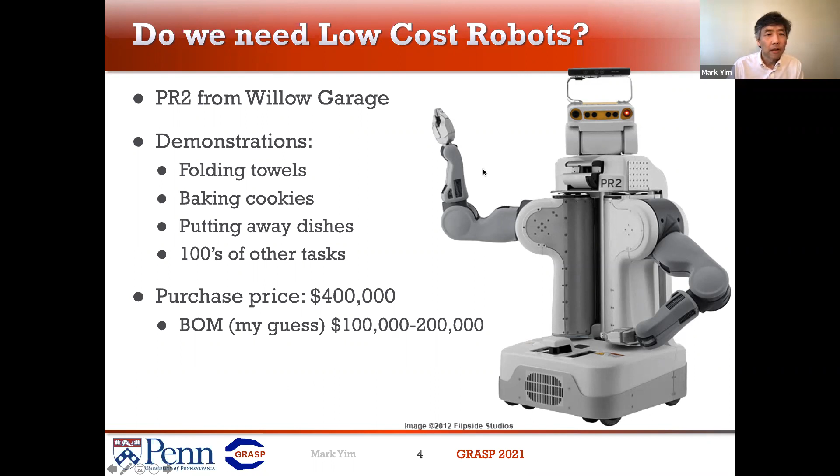So it's pennies, it's super cheap, but what does it do? It kind of walks. It doesn't actually do anything useful either. So this is like the other end of the spectrum from the Willow Garage robot, the PR2. Ultimately, you want to ask, is it cost effective? That means it doesn't only have to be low cost, but it has to do something that has value. And so ultimately, that's what we want to look at. How do we make impact on the world by making robots that do something useful that people might actually want?

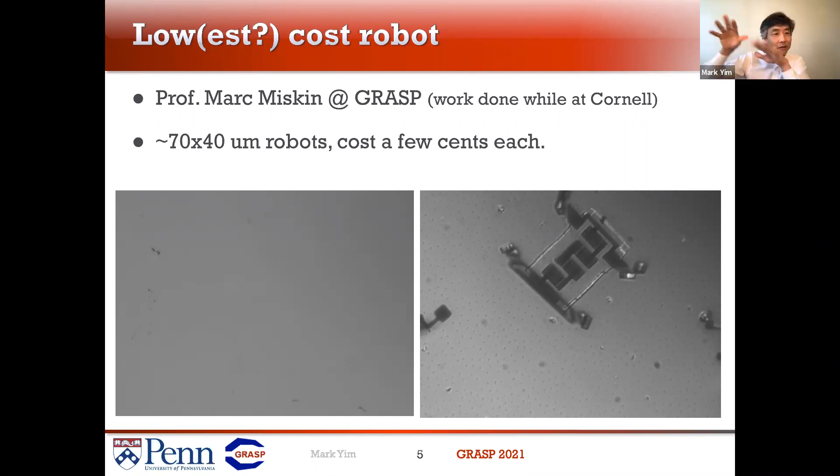And this is where I get to the thing which I put in my abstract. When you talk to other engineers, they always talk about the science they're doing, and often low cost aspects of anything you do in engineering or science don't get a lot of respect. Because it's just engineering, you just engineer it and then it'll be low cost. We've done all the hard work by coming up with this scientific thing, and then you just do the scut work to make it low cost. That's one of the things that I kind of rail against.

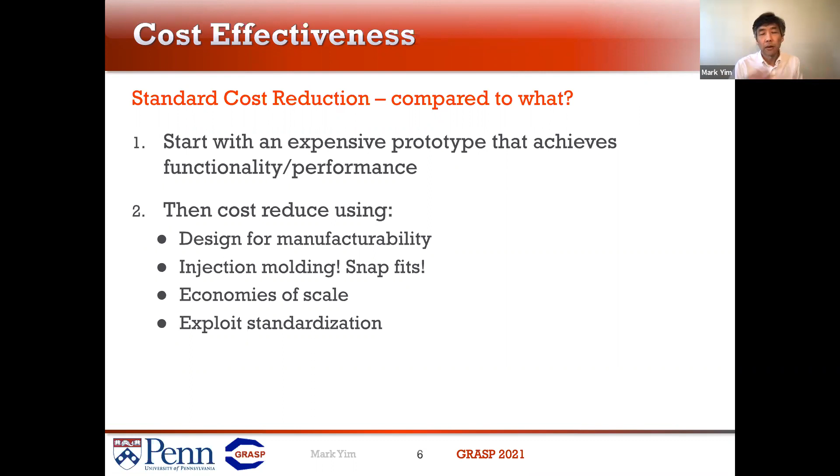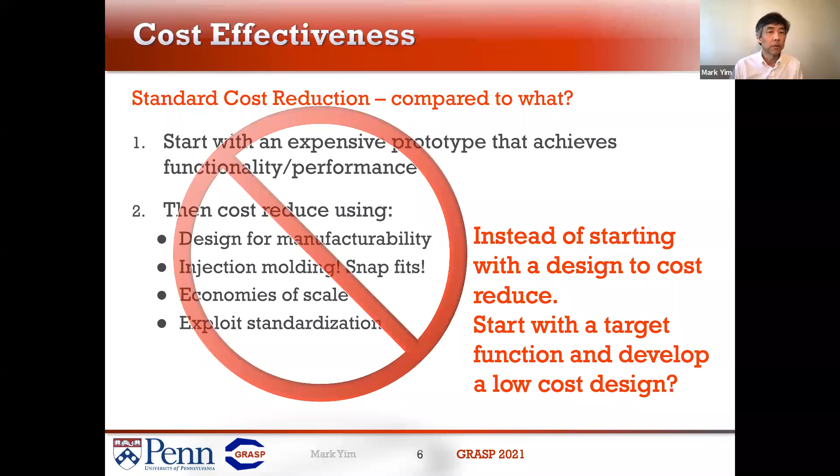In general, when we talk about cost effectiveness or low cost, it's always compared to something else. If you start with a prototype, you have that thing that you're comparing it with, so you can cost reduce and everything makes sense. If you don't already have that prototype, what are you comparing with? So what I'm proposing is, instead of starting with a design, can we look at a target function and develop a low-cost design for that function? And what are some of the principles towards that process? That's basically what this talk is going to be about.

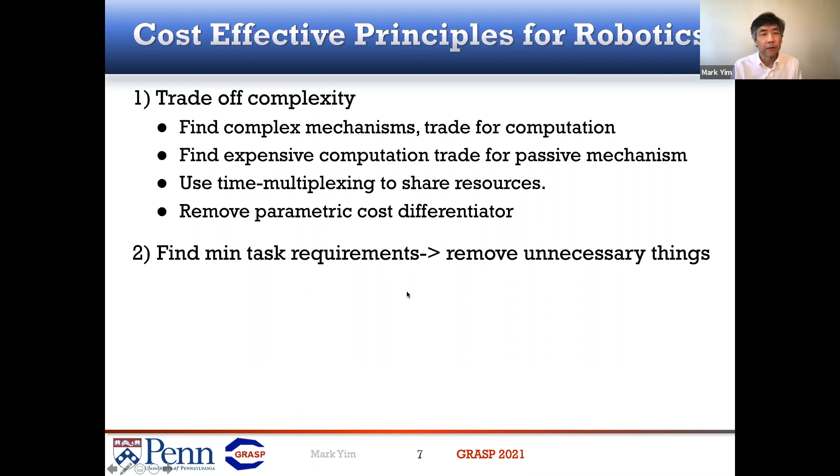These are a couple of the principles that I think would apply to most of the things I talk about. Essentially, you can trade off complexity to make things lower cost as you try to get to a certain target, or look at the thing that you want to do and ask whether you really need all those requirements, or can you remove unnecessary things that don't actually contribute to what you really want to have happen.

Within the complexity trade-offs, there are a variety of things you can do, like trade off complex mechanisms for computation, find expensive computation and replace it with some passive mechanism, reuse certain resources through time multiplexing, or something I call removing parametric cost differentiators. I'll get into more examples of these as we go. You'll see this slide again and again as I talk about these different aspects. Okay, so let's jump into an example.

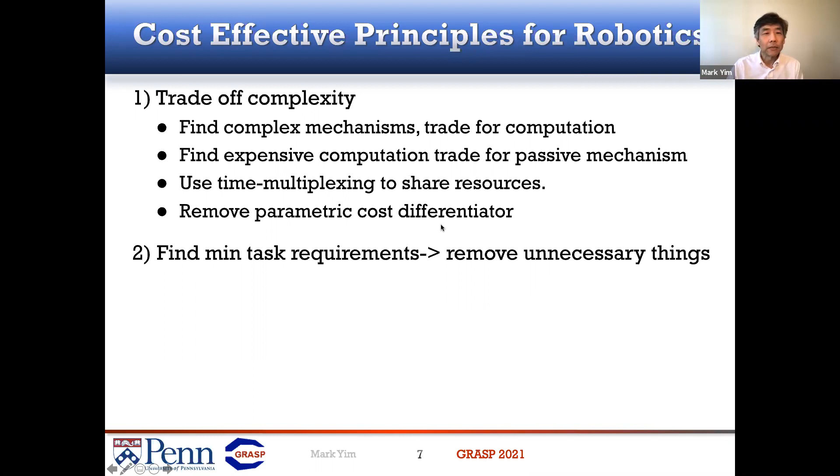Any robot will have motors in them.

Actually, I want to try something in chat. For anyone who has made a robot, can you just say 'me' in chat, so I can see roughly how many people have. All right, so there's plenty of people, somewhere between 20 and 30. And of those, how many of you have used a Maxon motor in your robot? Okay, so it looks like probably half, maybe more.

So Maxon motors are very popular. They are also very expensive. This actually is a funny story. I don't think I have time, but if we have time at the end, I'll tell you about my dealings with Maxon, which actually incentivized me to come up with a different approach. Can we come up with a way of using cheaper motors than Maxon? And why is it that everyone uses Maxon motors?

So to a large extent, from what I know from most people, it's because you want to have smooth motors. You want to get rid of the torque ripple. If you take a motor and you kind of twist it, you can feel the bumps just from the mechanism inside. And we'll talk a little bit more about that.

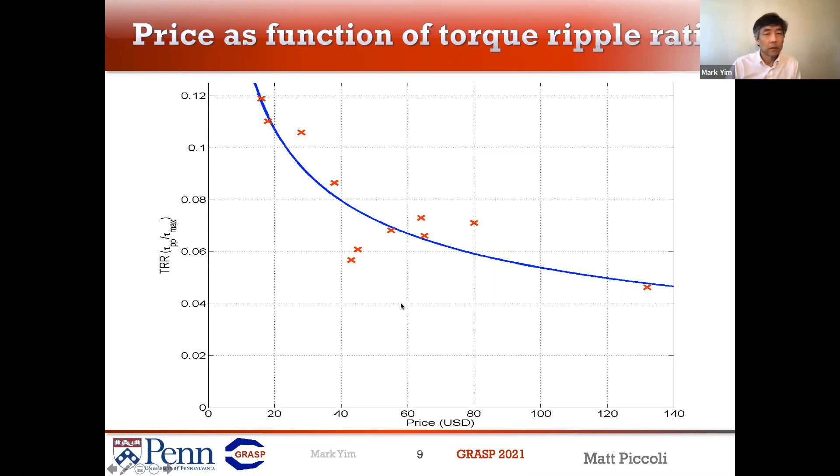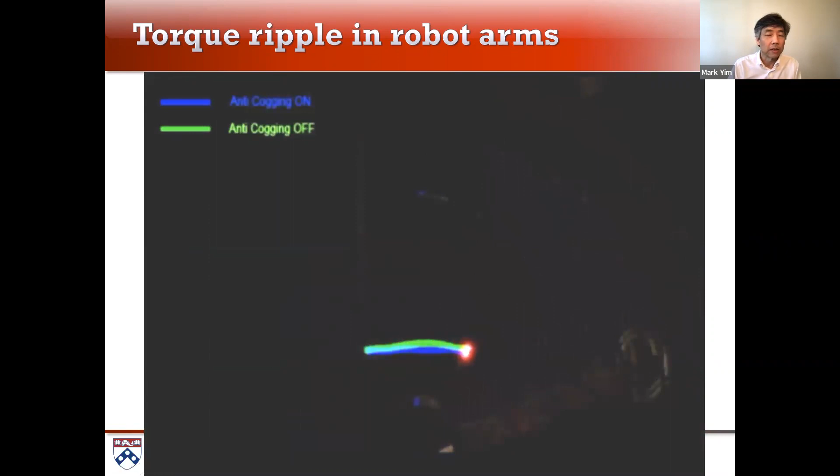So the goal here was to see, can we actually come up with a way to use these lower cost motors and somehow get rid of that torque ripple? And why is this important for robotics? If you've done anything with haptics, you can feel that ripple, and that's a problem. If you do want to do something like just make a path, this is a square with the cogging removed, and if you saw that green path, it's kind of wobbly. So it's kind of useful to have a way to get rid of that ripple.

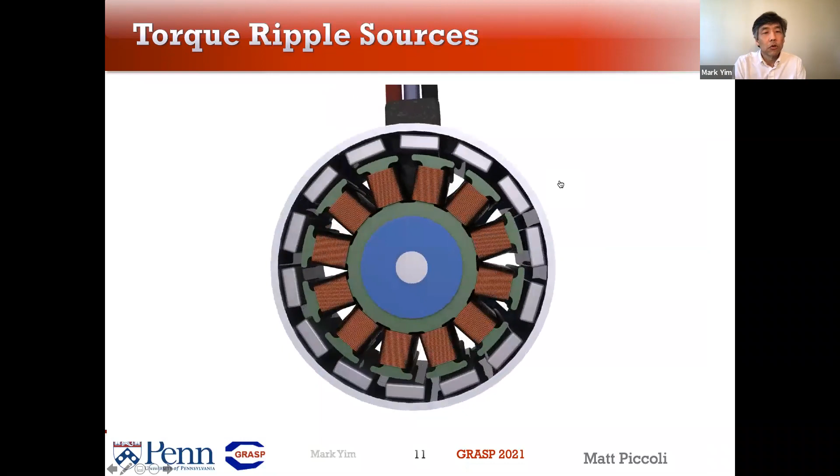So where does torque ripple come from? There's two main sources. For outrunners, you've got the rotor on the outside with the magnets and the stator, which has the coils on the inside. Very often people use what they call sinusoidal commutation to reduce that torque ripple, but it doesn't do everything. It's usually not perfect. It's going to be slightly off. So that's from the mutual reluctance torque.

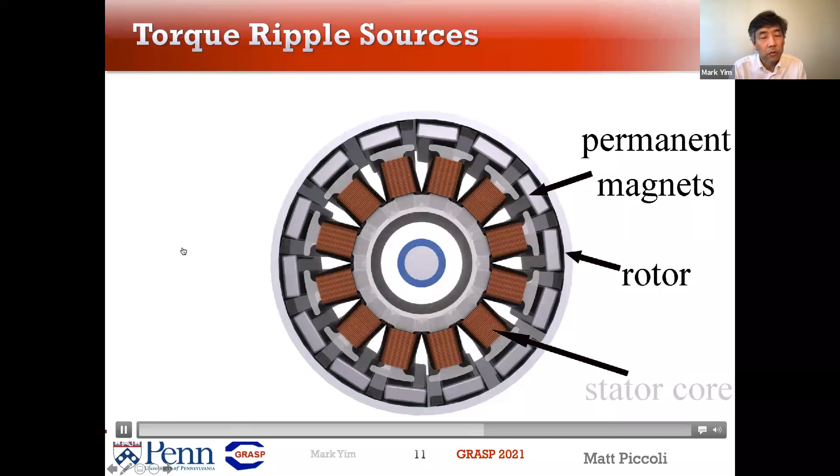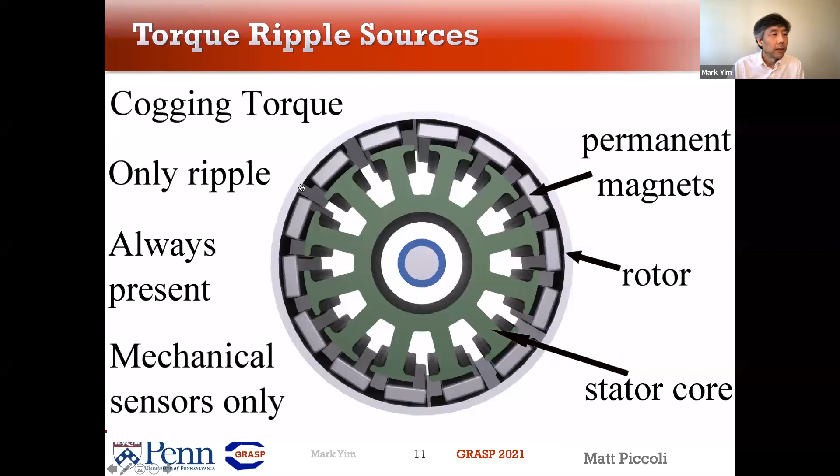But there's also this cogging torque, which just comes from the magnets being attracted to the stator. And that you can't get rid of through any type of sinusoidal commutation. You have to know what it is.

So there are other approaches for getting rid of or reducing this torque ripple ratio. And that includes the different types of commutation, which doesn't do everything. People have put torque sensors on the motors and then closed loop feedback to reduce it. It's a very expensive way to do it.

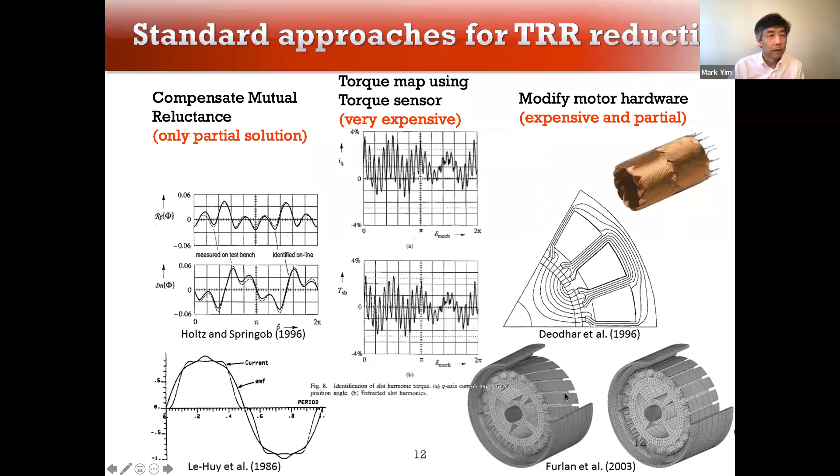And then there's the Maxon method, which is they have these expensive basket wound coils. The way they do it is proprietary, but it makes it very expensive, and it has very low torque ripple ratio because of it. There are other kind of experimental ways of doing things like skewing the stator and other kinds of interesting things, but they're typically very expensive.

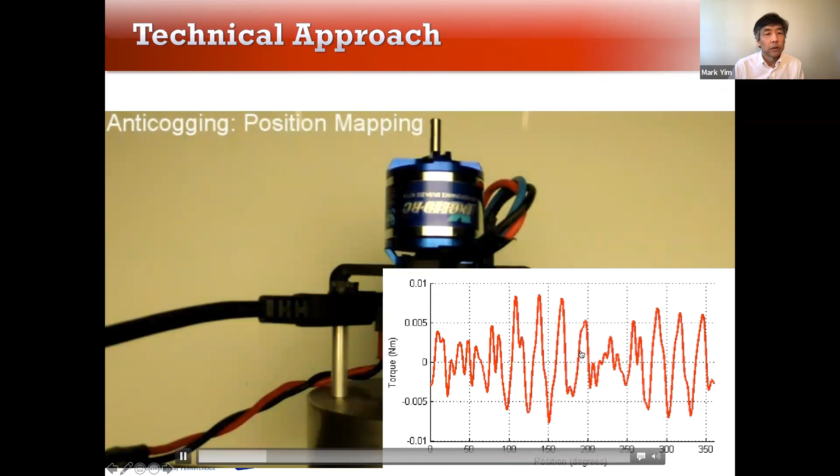So what my student, Matt Piccoli, came up with was a way of measuring this torque ripple ratio by putting a position sensor on the motor. And if you have a robot, you're going to have a position sensor on it anyway. So once you have that position sensor, there's two different approaches. You can either add an increasing amount of current until it just starts to move to find out what that torque ripple is, or you can do a constant torque and see how the speed varies.

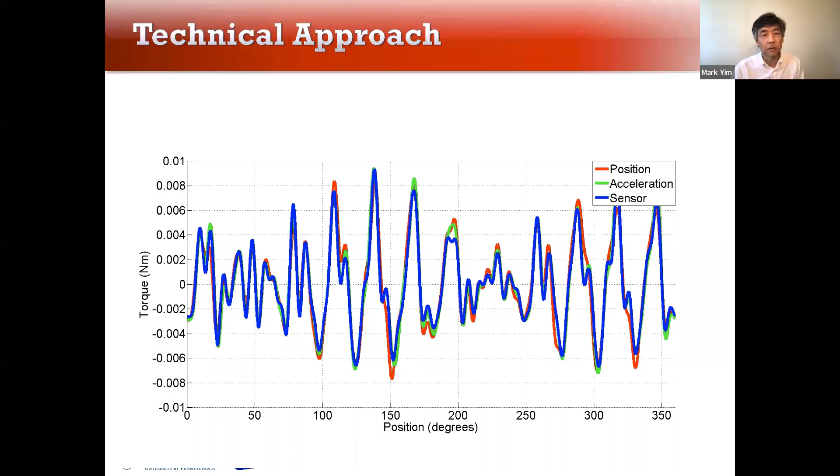And essentially you can map out that torque based on the different position. Once you have that, you can invert it and then apply this to every command to compensate, depending on what the position is, to smooth out what the motor looks like.

So compared to the cheapest motor, the Maxon is 9.4 times more expensive, almost an order of magnitude more expensive, but the cheap one performs better. It's smaller, it has higher torque, all around, and all of them actually perform better than the Maxon motor.

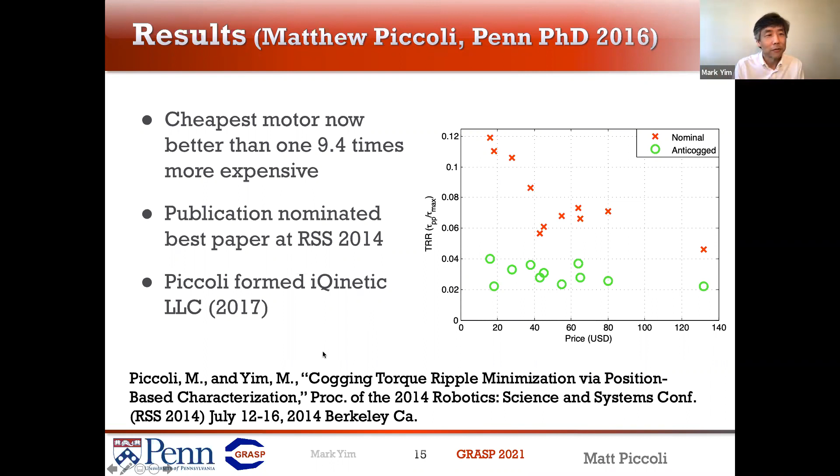So that's one way of doing things. So essentially, this is what I call the parametric cost differentiator.

The torque ripple ratio is a parameter, and it's a differentiator which makes the cost different. So if you can remove that, you can then get more cost-effective results.

There's a question in the chat: what kind of encoder resolution is required? This was, I think, one of the Austria Microsystems magnetic encoders, and it was like 1,000 or 2,000 resolution or something like that. I'm not sure that you need that, but those are cheap and they work well. So compared to Maxon motors, we were able to improve the torque ripple performance.

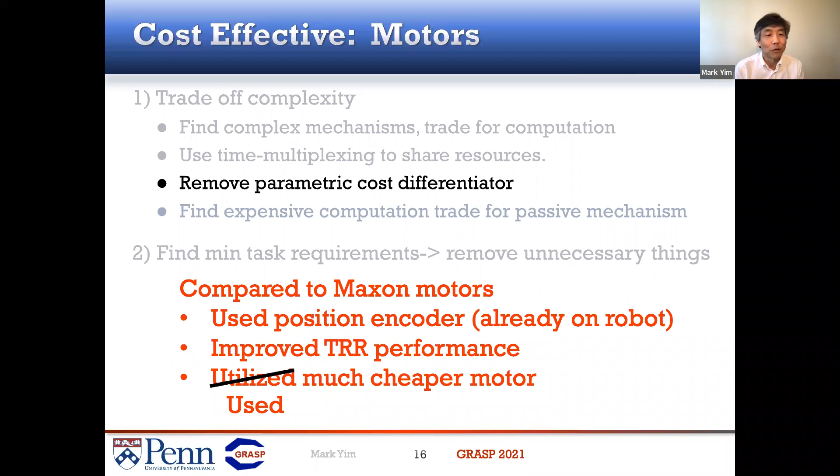There's another thing that's interesting here. So we utilized a cheaper motor. I wrote a proposal with Allison Okamura, who I think many of you know, and she says, anytime you see the word utilized, don't use it. Use the word use, because in this particular case, use is more cost effective than utilized. It's shorter, it means exactly the same thing. So you don't ever need to use the word utilize. So in my parlance, it's more cost effective.

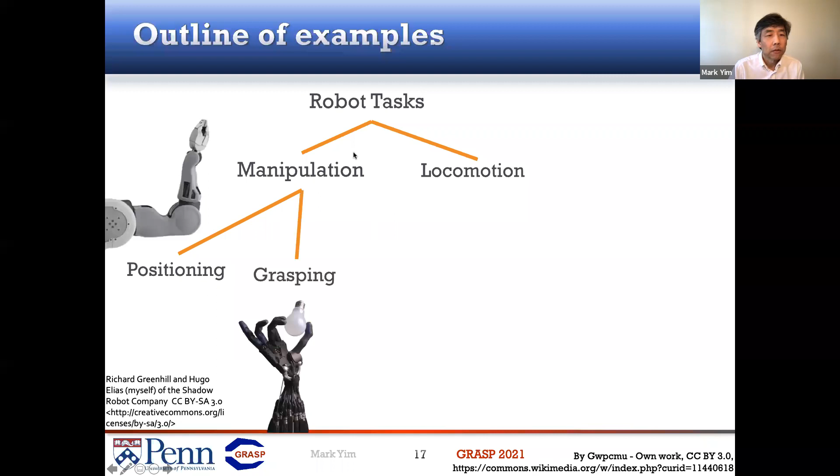Okay, so the rest of the talk, I'm going to talk about examples of tasks. And robotic tasks can be broken up into two, manipulation tasks and locomotion tasks. First I'll talk a bit about positioning and grasping examples, and then an example of land, sea, and air, different robots.

Another question in chat: since Maxon motors are proprietary tech, is it possible it is a cost-effective method, but they're just selling it at a much higher price? Yes, that's possible. Who knows? Okay,

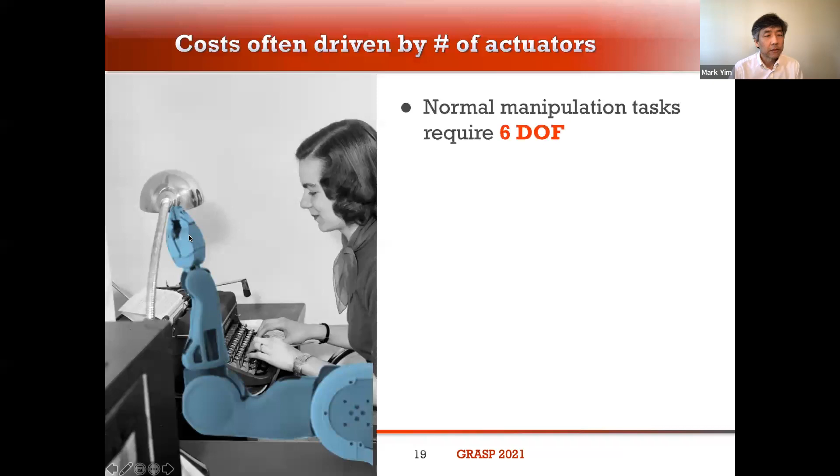Usually when we design robot systems, the costs are driven by the number of actuators, and the number of actuators is usually correlated to the number of degrees of freedom. So a normal arm might have 6 degrees of freedom, 6 motors, and if you wanted to adjust the lamp, there's the elbow down or elbow up configuration issue, because the inverse kinematics have multiple solutions.

In this case, this elbow may be bumping into the table, or in the other configuration, maybe bump into the person. So a lot of times people add a 7th degree of freedom so you can adjust that elbow to be wherever you want. So you might end up with 7 motors. Another thing to think about with a robot arm is the reach. How far does it need to go for the workspace to satisfy the task that you have?

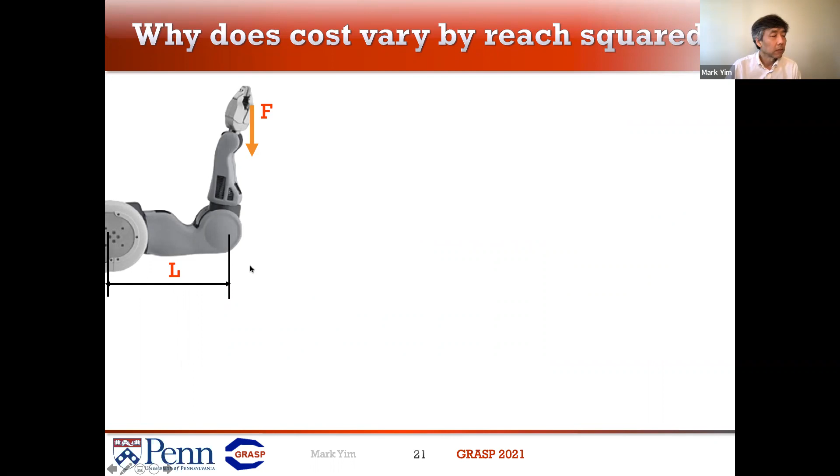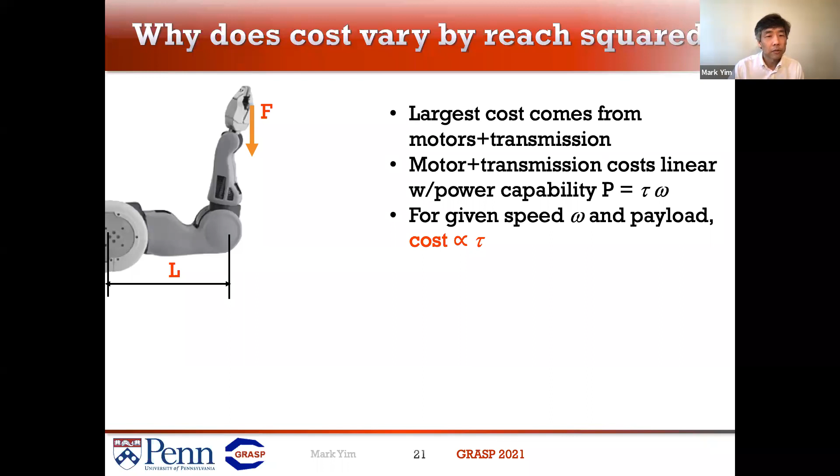If we analyze a robot with a certain reach scale, L, and a given force that you want the robot to apply at the end effector, we usually look at the motors and transmission, as that's where the dominant part of the cost comes from. Motors and transmissions are usually linear with power, torque times speed. For a given speed and payload, the cost will be proportional to the torque. If we double the reach, what happens for the same amount of force?

Couple ways to think about it. If this design has an elbow and we put a motor out at the elbow and the motor has mass, if it needed to have more torque because now the part of the arm is larger, then it would need to be bigger, and that mass would then increase the requirement of the torque at the shoulder. So if you do everything proportionally, basically it goes by the L squared.

Or if the weight of the arm itself is going up, then you also have to compensate for that. And so that's another reason why the combination of that with the motor mass or whatever, basically you can see that it'll be super linear and possibly quadratic. So it kind of makes sense.

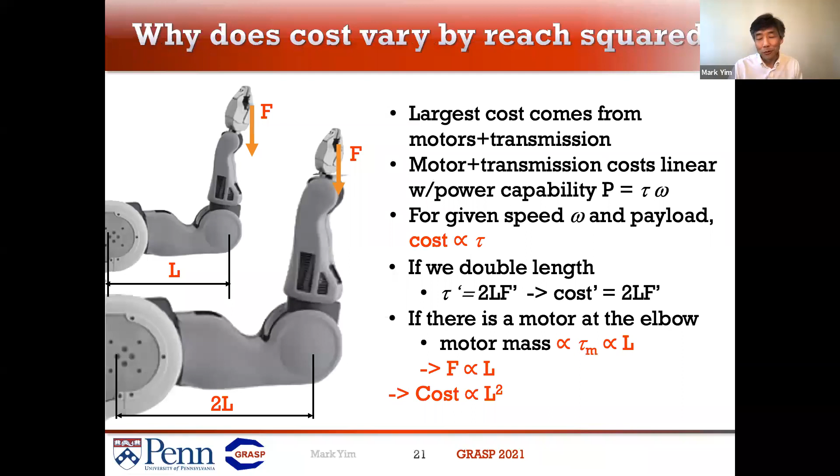So one of the things I've been thinking lately is that elbows are bad as a general rule for manipulator arms. I don't know if it's true, but how can we get rid of elbows? There's a really old robot arm configuration called spherical robots. These are polar robots. There's a prismatic joint in which this thing goes in and out.

And in fact, the Stanford arm, the very first industrial robot arm, was this, as well as the Unimate. They had this configuration where the one joint is prismatic, and then it's mounted on a 2 degree of freedom shoulder. Okay, so there are configurations in which there is no elbow.

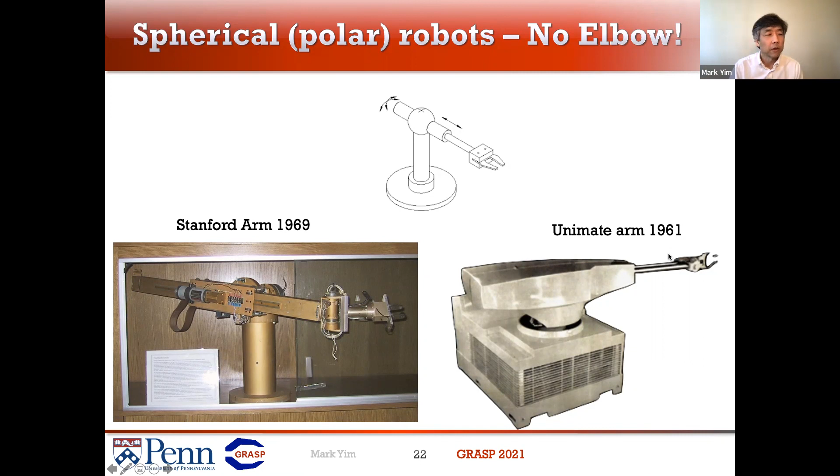And so this is kind of an interesting insight, right? If you can see what they're doing. And actually another thing, if you think about the way we design offices or our workspaces, you might have all of these different things around your desk and you can reach them, but you can also see them. So there is a line of sight between your eyes and whatever it is that you want to manipulate. If you have that line of sight, that means that it's obstacle free.

Obstacle free means that if you had a robot arm attached to your head that went out to the objects, you wouldn't have to worry about doing any collision motion planning or collision detection, because the path is there because you can see it. So that's one of the things that you get for free if you had no elbow.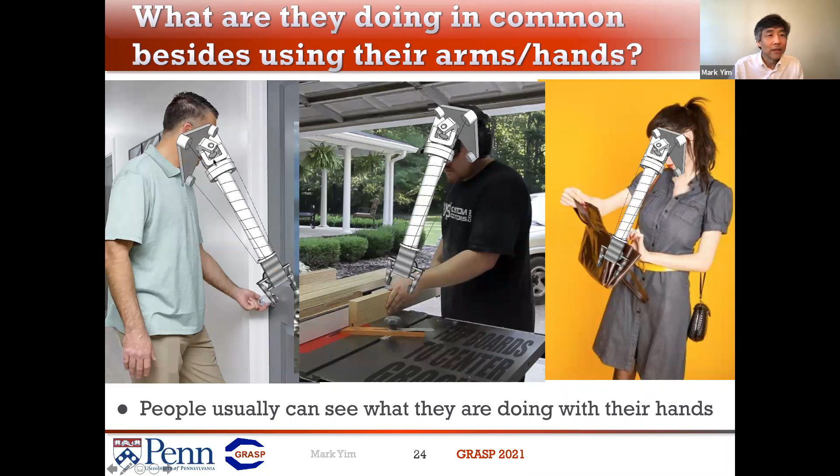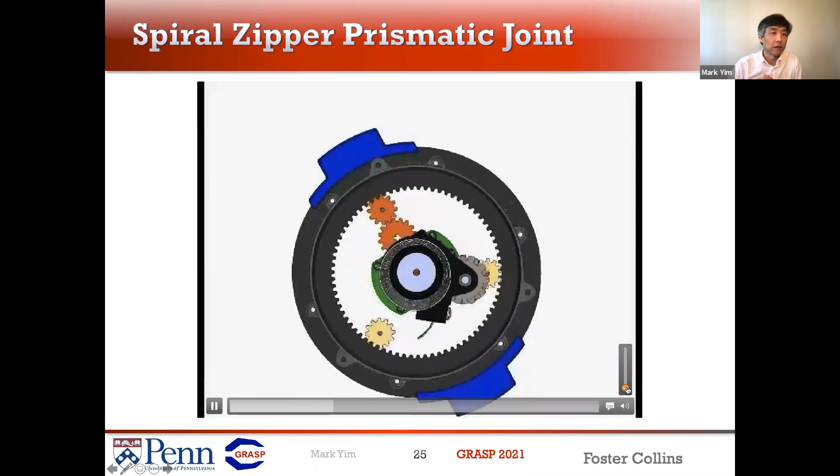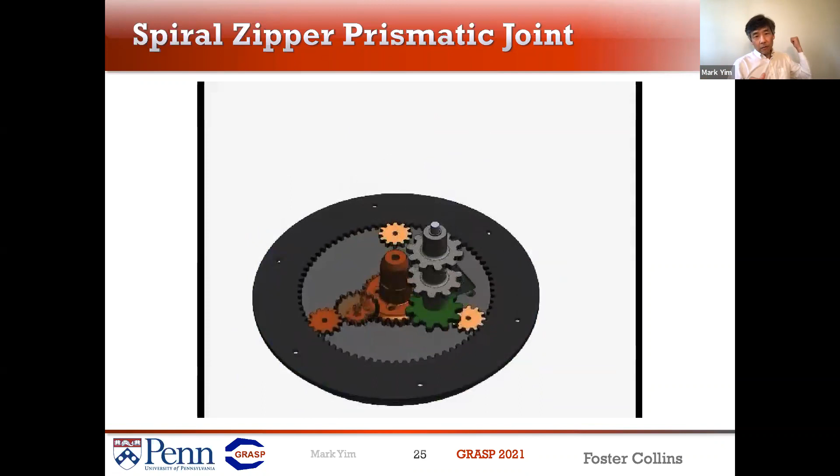So one of the things we were thinking about is, can we come up with a design that has no elbow, with a nice prismatic joint? One of the reasons I think the old Stanford arm and the Unimate arm didn't do so well is because the prismatic joint is expensive. And not only is it expensive, it's usually like a rack and pinion. You have this big bar that, when you try to retract it, sticks out the backside, and that causes a problem of collision on the backside.

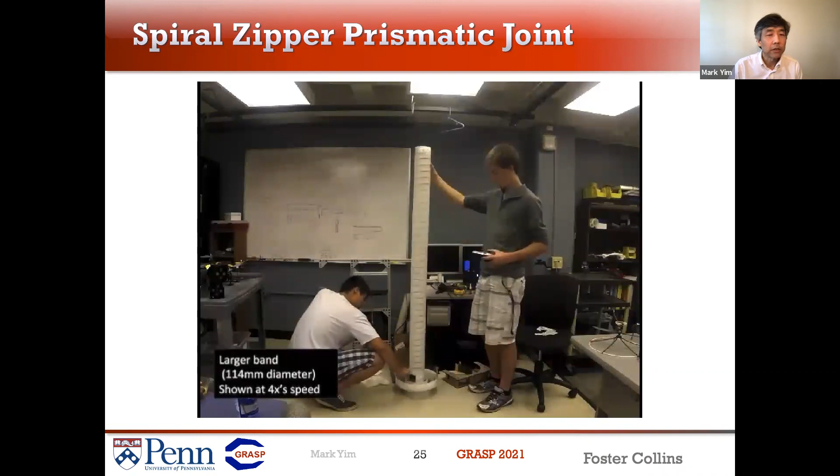If instead you had a prismatic joint that could expand or collapse more easily with a large expansion ratio, then you might be able to come up with something useful. So we came up with this thing we call the spiral zipper. Actually, there are related products already out there. And you put it on a gimbal with cables at the end, then you can have essentially a 3 degree of freedom positioning device that has no elbow, that could be really useful.

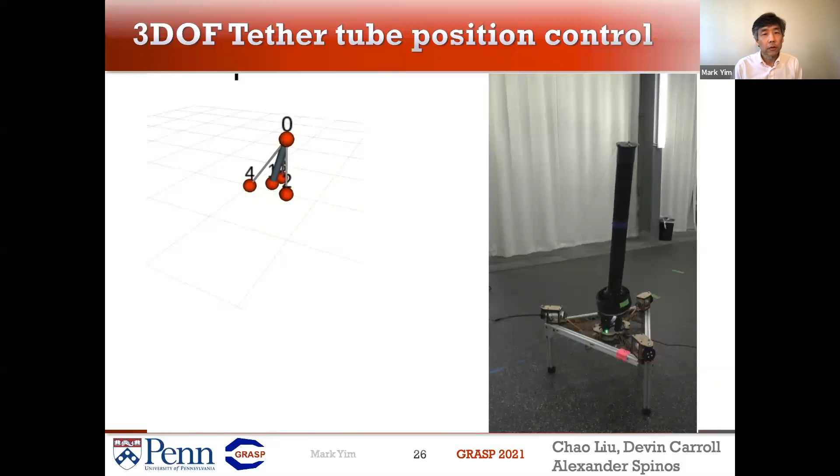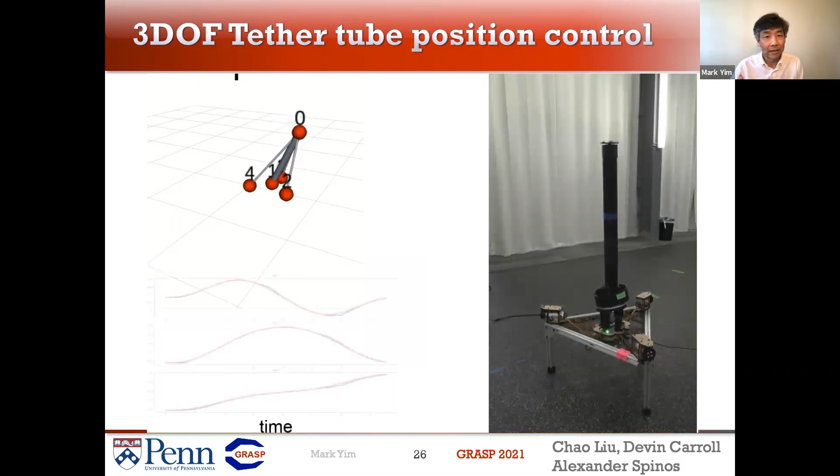Besides having a large reach, the cost doesn't scale quadratically because the mass of the arm doesn't grow. The majority of the mass is in the base. The tube is actually very light. And in fact, because it's a tube, it's essentially optimal in strength to weight ratio under compression, having a tube shape.

So that means that the cost scales linearly with reach. As the reach gets larger, the forces at the base scale linearly with how far it goes out, not quadratically. So again, this is removing the parametric cost differentiator, and then we get this collision avoidance thing for free, which is kind of nice. So that's a positioning example.

Grasping, what we don't have is grasping out at the end. We still need a gripper at the end, and of course we might also need orientation. If you look at grippers, there are these high dexterity hands that I would say are the opposite of low cost, and I might also say the opposite of utility.

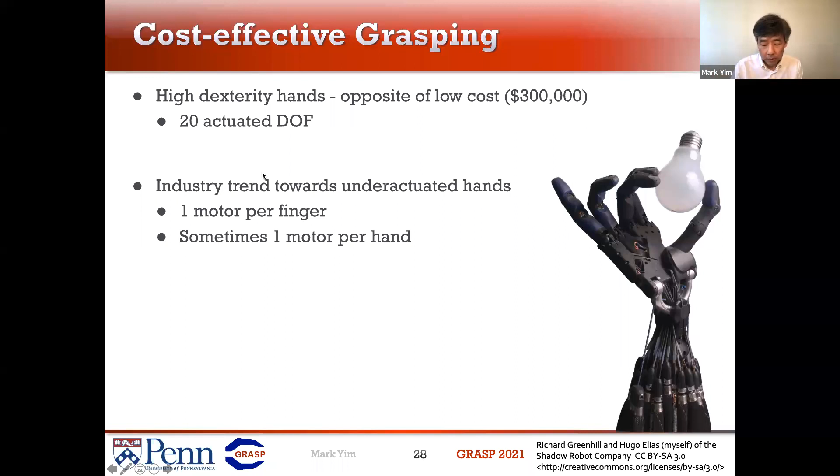Some of them cost over $300,000 with 20 actuated degrees of freedom. Do you really need all that? What do you need that for? The trend in the industry: I went to one of these ICRA trade shows a couple years ago, and there were like 3 robot companies that were selling underactuated hands.

So these are the ones which have cables typically, or different types of transmissions, in which there's one motor that drives the fingers or the hands, and because of the cables or the way that they do the transmission on the inside, it'll automatically wrap around objects, or a parallel jaw type gripping, a slightly more improved version.

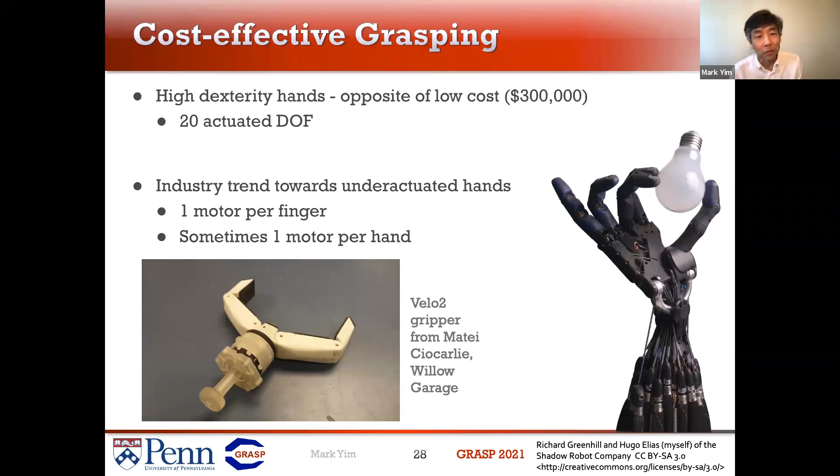This is a picture of the Velo 2 that Matei Ciocarlie developed while he was at Willow Garage. So that's a trend and an example of moving in this direction of reducing the number of degrees of freedom to get lower cost and still have high performance. The thing that I was thinking about is, what about 0 motors? What's better than 1 motor in terms of cost? 0 motors. So what can we do with 0 motors?

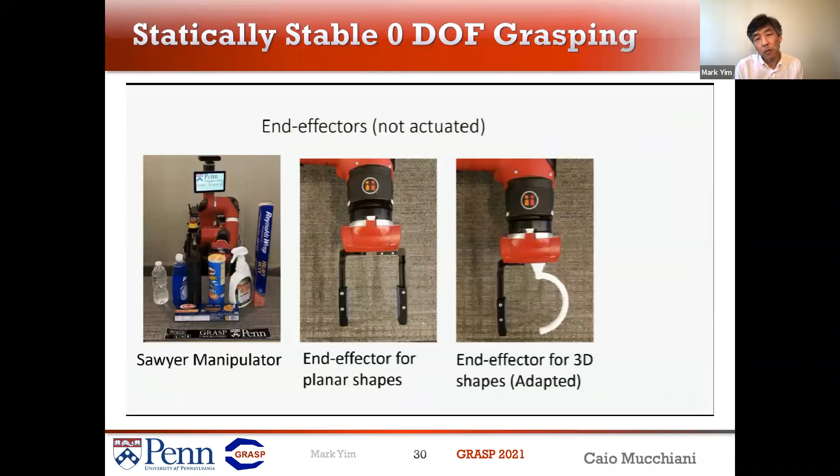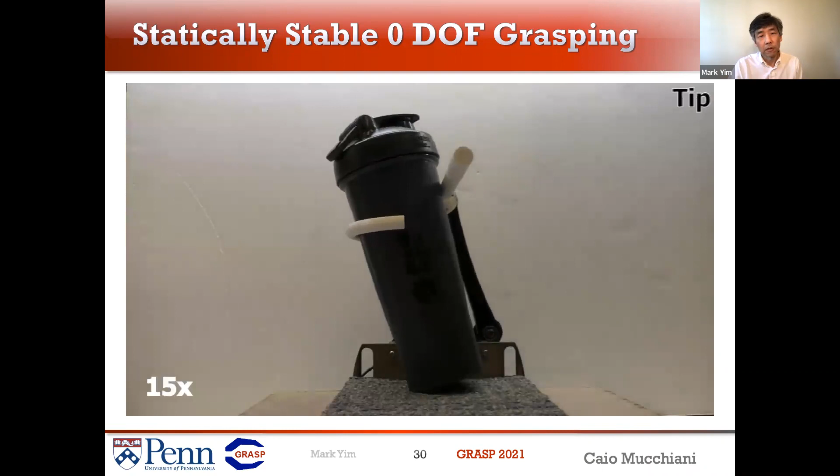So the idea here is, if you think about objects, this probably won't work for every object, but there is a class of objects which you can pick up without having to close on them and apply opposing forces. So this is a way to pick up objects statically stably with a 0 degree of freedom gripper. First, you'll notice it flips back and forth as it tips it one way, and then it has to flip the other way in order to grab it. And if the center of mass is offset from where it's picking up, then you can grab it stably.

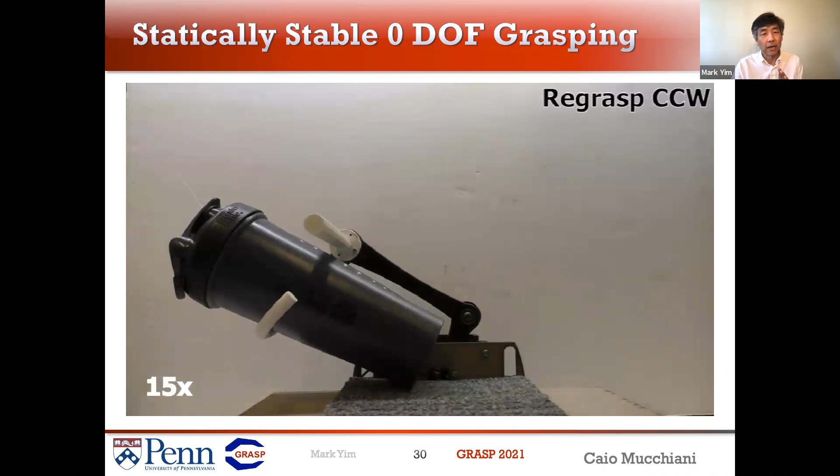We've also developed a way in which there's a force sensor on the inside, and there are different states in the tilting and picking up position that you can sense with that force sensor, both for picking up and putting down, which is pretty straightforward.

Another thing that's more recent, this is a paper that hasn't come out yet, but instead of having to do things quasi-statically, what if we could accelerate the arm and pick it up really quickly? If you don't accelerate in the right way, then the object slips out of the grasp. If you do it almost right, sometimes you can get it to stay, but it slides a little to the end. And here's one where, if you scoop it up and rotate it in the right way, you can actually pick it up without having to grasp it.

This is all based on stuff that Kevin Lynch and others have done in terms of analyzing forces as you try to manipulate objects. So there's the center of mass, the contact points and their locations, the friction cones on the cylindrical object. And in this case, we also add the inertial forces along the path of grasping it, and you can guarantee that it has stability as you lift.

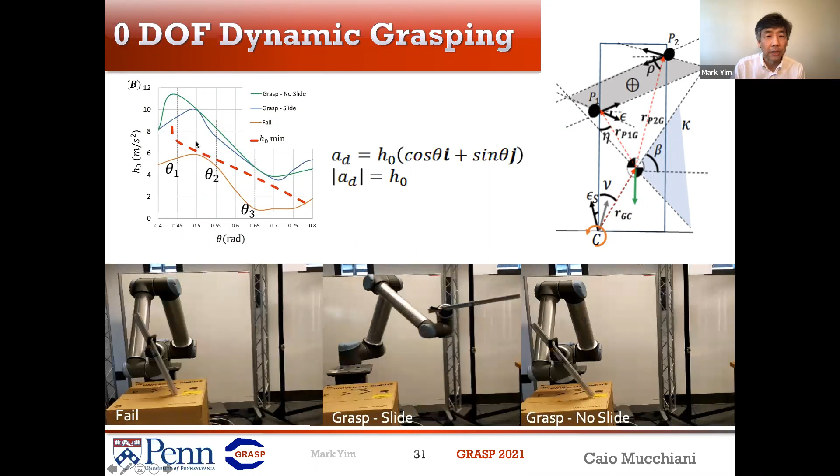So how well does it work? We did something like 150 trials, and it was about 95% success rate over different objects. This is with just modeling a cylinder, but including objects that have liquid that changes their mass or other things that we didn't actually model. It still has worked fairly well for most of these cases.

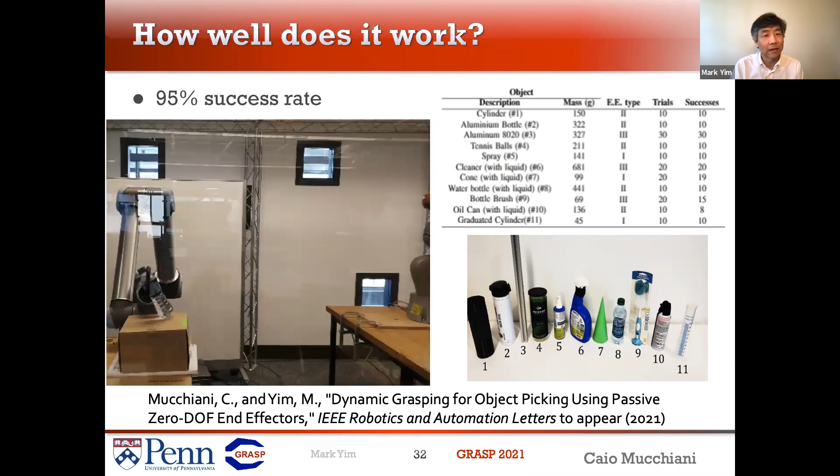The other thing that's useful is, I don't know if you've seen demonstrations of robots handing an object to another person. A lot of times it's really awkward because the robot doesn't know exactly when to let go. So the person grabs the object and has to yank it out of the robot's hand, until the robot senses he's trying to pull it out, and then it lets go. But if you don't have a gripper that's grabbing onto it, transferring the object is easy, right? The person just takes it out, which is nice.

So in this particular case, the principle that we're using is that, for certain objects, we can remove these extra degrees of freedom because they aren't necessary for these objects. In this case, the objects also have to be kind of long so that we can get the stability from the center of mass being offset from where we're grabbing it.

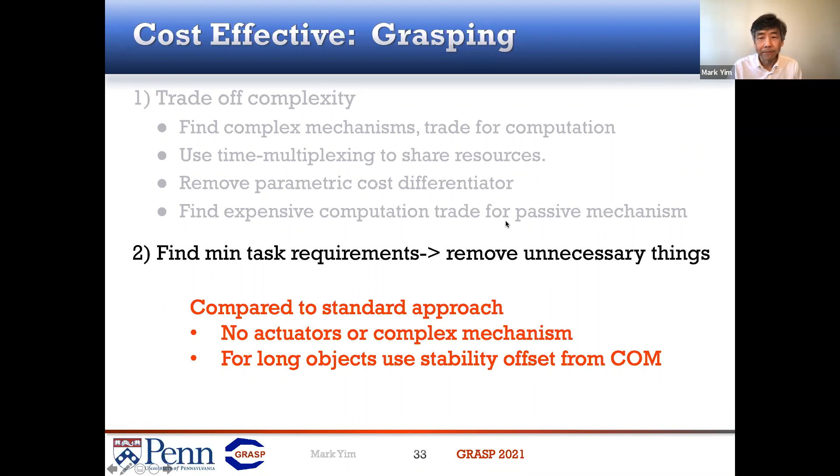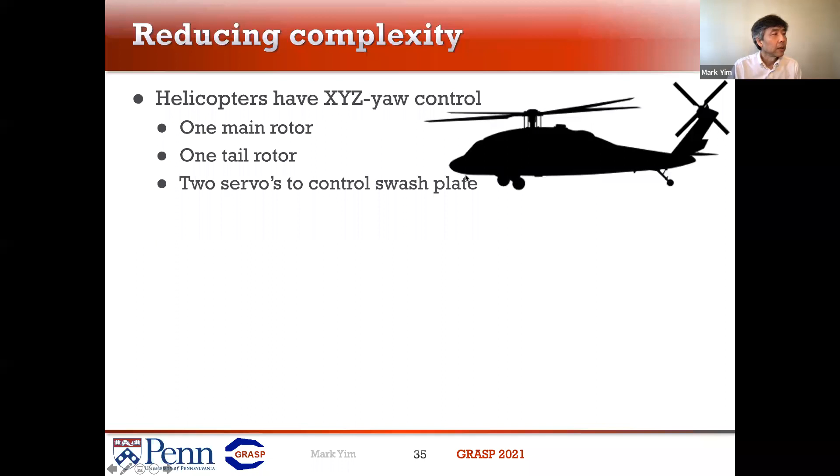All right, so those were some manipulation examples. Let's look at some mobility or locomotion examples. For flyers, in particular, let's look at a helicopter. A helicopter has this thing that's called a Swashplate. The Swashplate is actually a very complex mechanism. It has 5 linkages, 8 ball and socket joints, a ball bearing, and 2 servos. So there are essentially 3 actuators.

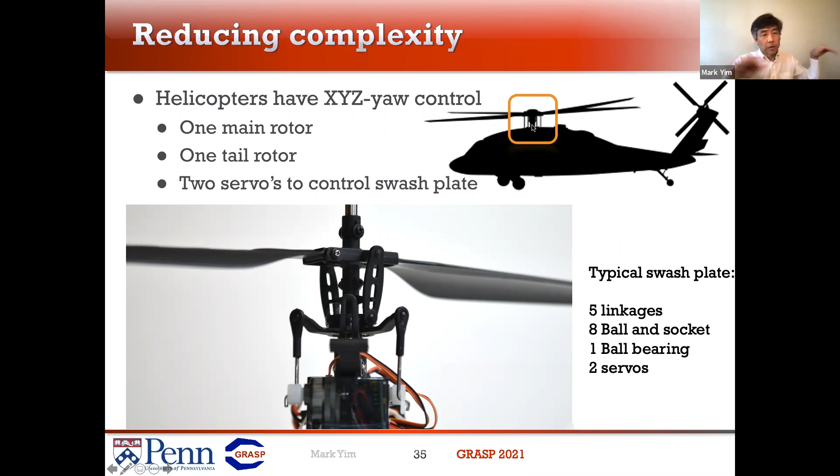There's the main rotor that spins this thing, and then 2 little servos that change the pitch of the blade as it spins around in order to get attitude control. So the Swashplate provides this attitude control. My other student, Jimmy Paulos, came up with this idea of modifying the blades. If you look at a normal helicopter blade, many of them have what they call a lead lag hinge. These hinges are vertical and allow the blades to swing backwards or forwards.

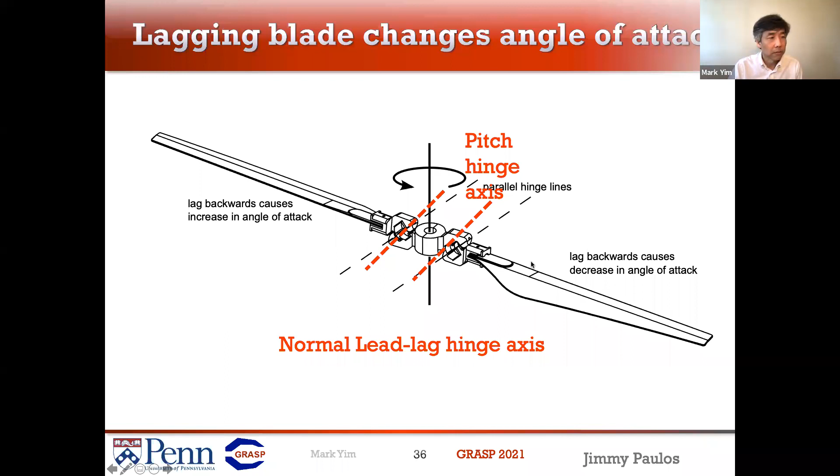Normally, a helicopter blade will also change the pitch. As the blade is spinning around, you may increase or decrease the pitch by rotating about this pitch axis. So the idea that Jimmy came up with was to change the angle of the lead lag hinge. If you angled it, then if the blade led or lagged, you would also get a pitch change. This is what the mechanism looks like. You can see that the lead lag hinge is not vertical, it's actually at an angle.

It might be easier to show you. Pretend my arm is the blade. Lead lag is rotating about the shoulder. This would be lag, this would be lead. By changing this axis so that instead of being vertical it's at an angle, the blade does this. If it went to lag, the blade would go down, and as it went down, the pitch would change. If you have a pitch like this, that increases the lift. If you had a pitch like that, that would decrease the lift.

So the idea here is, using the main rotor, if you suddenly pulse the motor so that the blade would lag, that would also increase the pitch. And so you get pitch control by pulsing the main rotor without having to add extra servos in the Swashplate. So essentially, we've got rid of the whole Swashplate, all the mechanism, 2 servos, and we're just using the main rotor to pulse to get pitch control.

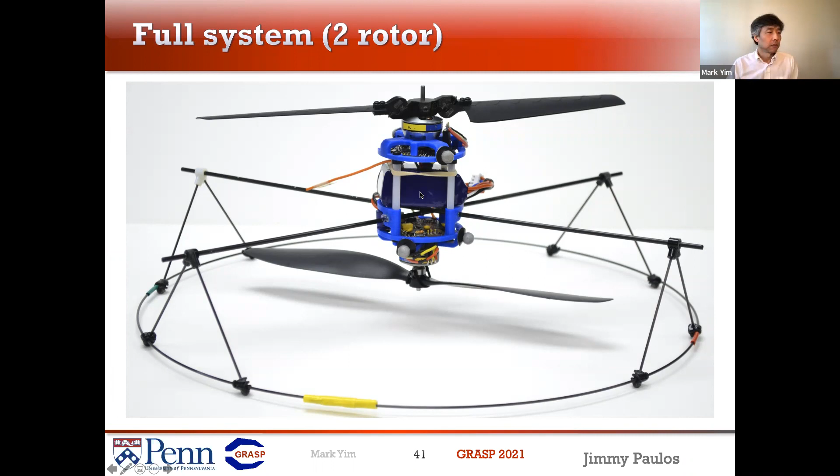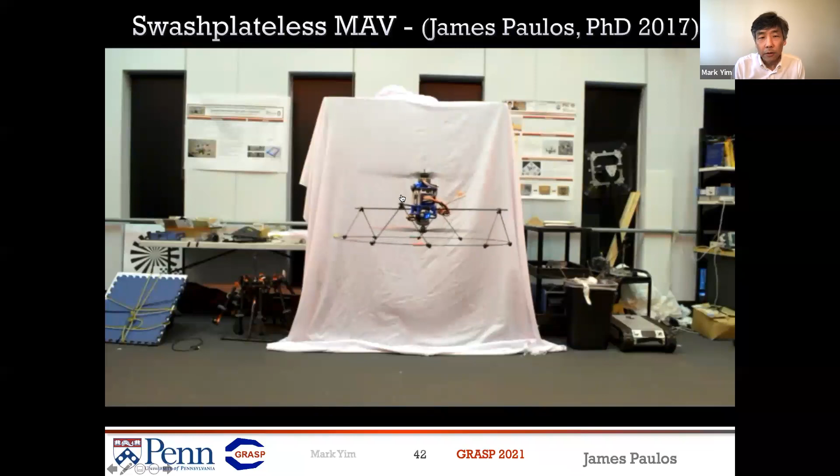So this is what the system looks like, and does it work? Yeah, it does. Here you can see it. You can do pretty much everything that a quad rotor can do. It is under actuated. In this particular case, there's 2 motors instead of 4. Because it's spinning so fast, you have to wait for the blade to be in the right place before you pulse it. So we're doing this thing that I call time multiplexing the resource, to get that one motor to act with that mechanism as if it was the 4 motors that you have on a quad rotor.

So it's a much simpler structure. One of the main advantages is that without all of those linkages and ball joints, it's much more robust. Usually in helicopters, the Swashplate is one of the things the maintenance people have to worry about the most because it is so complex and it's critical to the function of the helicopter. If something happens, it's a bad thing. So without all that, it's much more robust.

All right, here's another question for chat. Is this vehicle holonomic? By holonomic, I mean you place a frame onto this part of the vehicle. Are there no non-holonomic constraints on the control? Can we instantaneously move this in any of the 3 degrees of freedom? Just a couple people willing to take the leap. If you haven't seen this vehicle, it's got mecanum wheels, and yes, this is a classic example of a holonomic vehicle.

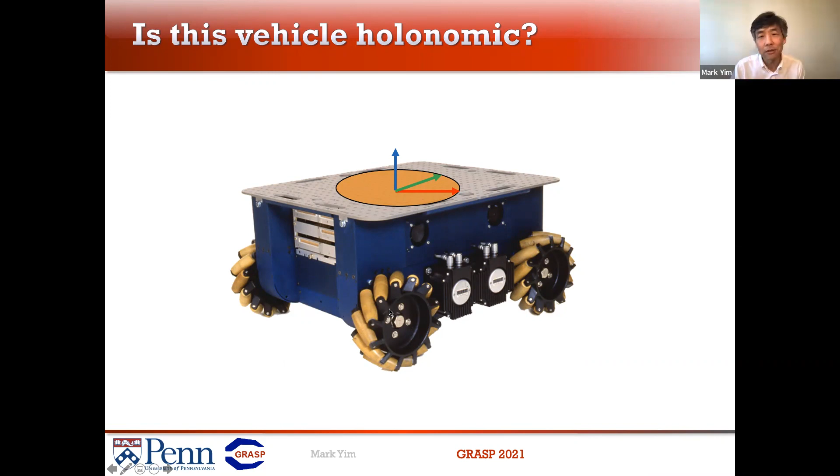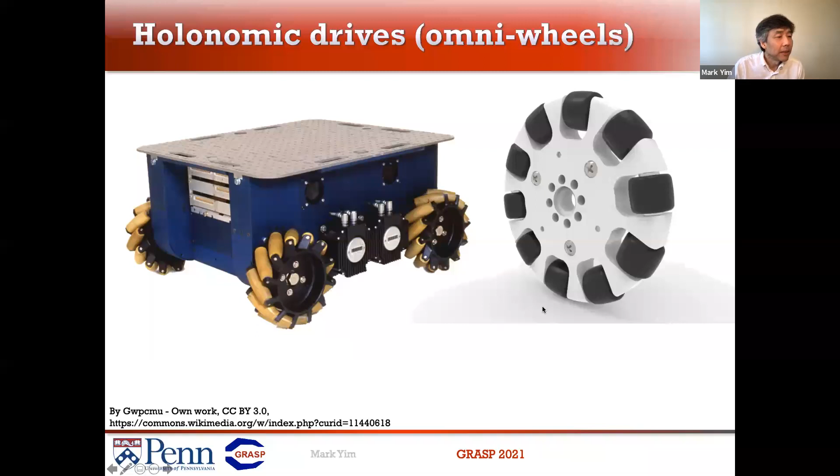You can rotate these things and it can go sideways because they have these wheels that are allowed to spin rather than move normally. For those of you who have not seen this before, it's a classic example of a holonomic vehicle. Holonomic vehicles are usually made up of omni-wheels or mecanum wheels. One of their properties is that they are relatively expensive compared to the load they can carry. Also, think about the size of an obstacle a wheel can cross over. Usually it's about 1/4 to 1/2 of the wheel diameter. But for these, it's not this wheel that's important, it's this wheel diameter that's important.

So these guys can barely cross over these tiny little bumps. Like if you had a power cord lying across the floor, they may get stuck because it's using these tiny little wheels. Nobody has cars with tiny little wheels because they get stuck on small things. So the performance is not very good. They only really go on very flat terrain and they're expensive.

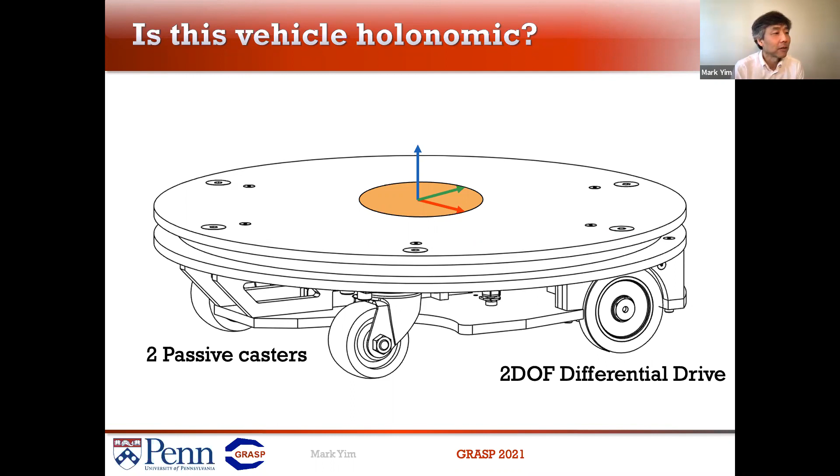All right, here's another question. We have a diff-drive robot. Diff-drive means there's 2 powered wheels in the back and casters in the front. We attach a frame to the top. Is this vehicle holonomic? Should follow your department chair's lead. Right. This, of course, is not holonomic. It only has 2 motors. There's no possible way that it can do 3 degrees of freedom with just 2 motors.

But what if we attached a turret on the top of this diff drive with the center here and added this 1 degree of freedom? So now we've got 3 motors in this configuration. Is this holonomic? It's a little bit more difficult of a question. No. Can't go sideways. So what does it mean to go sideways? We've attached a frame, and can this frame move sideways? Actually, you can. Right. So in this case, this vehicle is holonomic.

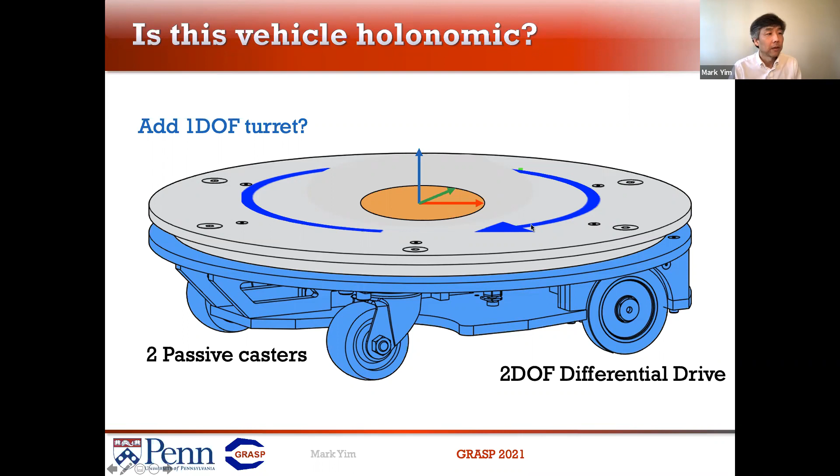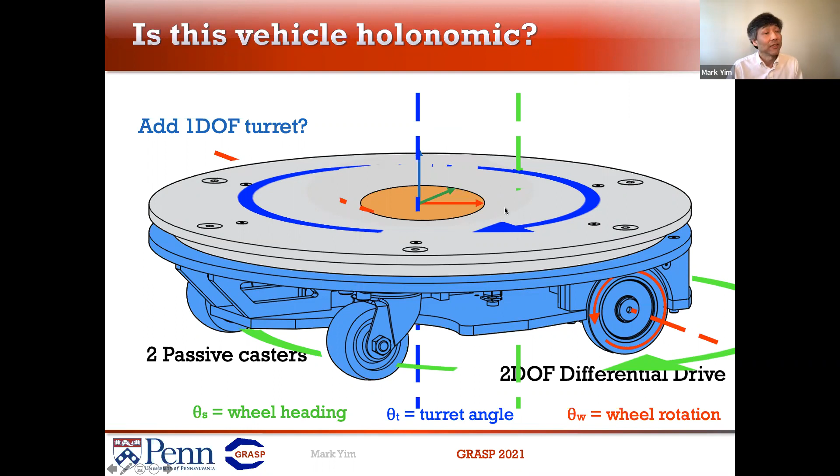So this is a thing where so many people look at this and they see diff-drive and they say, not holonomic, can't be holonomic. It depends on your frame of reference. If you put a frame here attached to the center of rotation for a turret that also spins, this is holonomic. A critical thing here that often people don't realize is if the axis of center of rotation for turning the two wheels is offset from the turret, it will be holonomic. If you align the two, it won't be holonomic.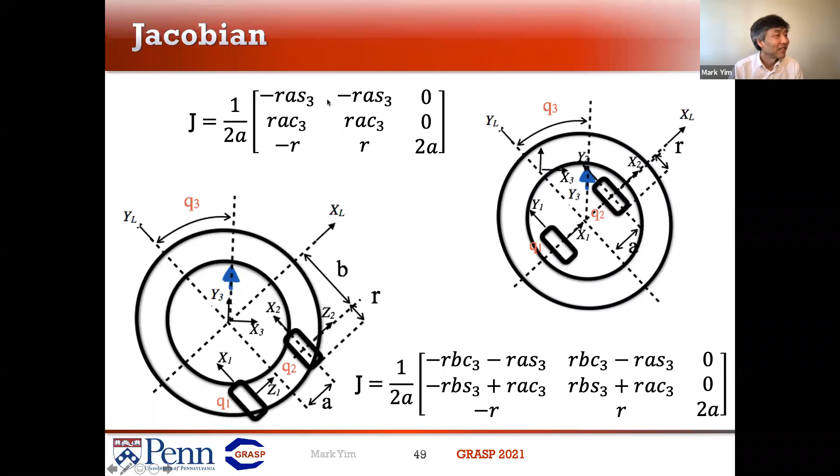What's wrong with this matrix? Does anyone see anything wrong with this particular Jacobian? You can type it in chat. Degenerate or singular. This is a singular matrix, right? This row is a linear combination of this row. This particular configuration is singular. It's in a singularity. This is why it's not holonomic. And people often miss that when you put a turret on there. If you have a turret that's aligned with the center of the wheels, it will not be holonomic.

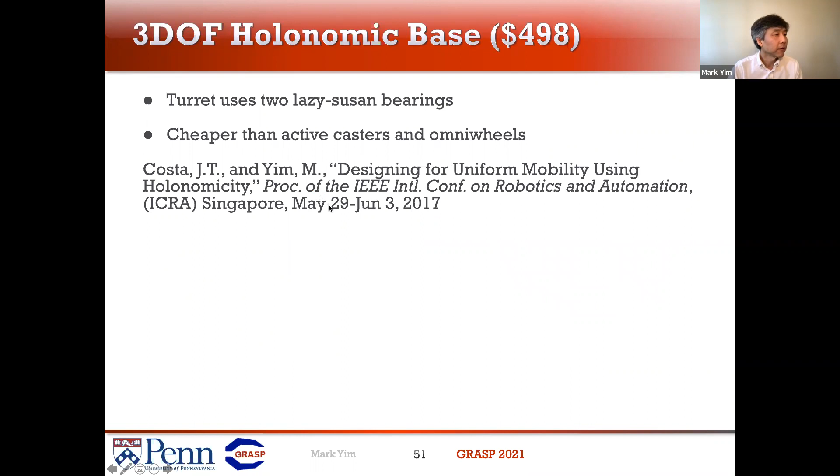Anyway, so it's basically, you know, so we're trading off the complexity. Why are the mecanum or omni wheels more expensive? They have a lot of little tiny wheels with a lot of little tiny bearings. We do need a slip ring. You probably need a slip ring. Sometimes you don't necessarily care about winding up, but yeah, you might need a slip ring, which sometimes can be expensive. Okay, that's a good point.

All right, on to another example. How am I doing on time? I think nominally we have 3 to 5 minutes left before questions. Okay. Do you need much more than that? We're gonna wrap around 1 hour, so right around 14 minutes from now we're gonna wrap. But then people who want to hang around and just talk more can hang around. Okay. All right. So I'll speed up a little bit. I think I'll go over a little, but I'll speed up a bit.

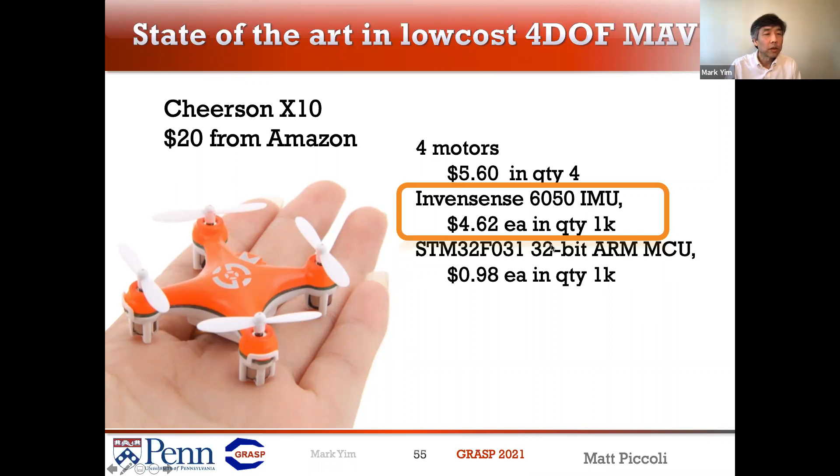So another flyer. You can get this thing from Amazon for $20, and they say it's the smallest quad rotor in the world. We took it apart and looked at all the different pieces, and the most expensive single component was the IMU. One of the things the IMU is used for is stability. You know, active stability. It's what the CPU uses to keep the thing from falling over.

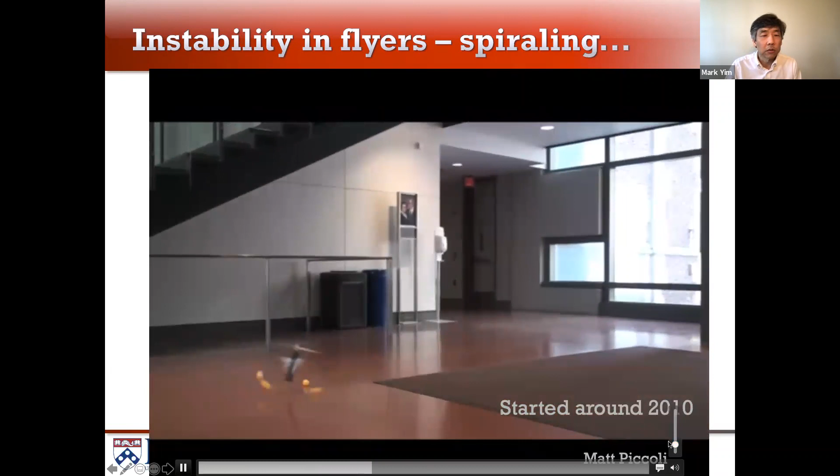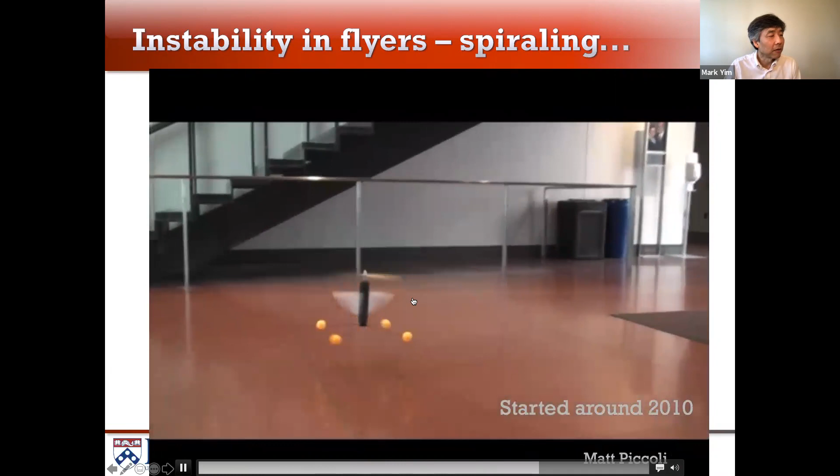This is what instability looks like. So this has no IMU. Essentially things go unstable. They kind of spiral around. We're just trying to get things to fly up, but it keeps going sideways and then falls down. So that's essentially instability in a flyer.

One way to get rid of instability passively is to put drag plates on. Essentially, this is a system that has the IMU removed, and instead you put these drag plates, which, when the thing starts to slip sideways, will cause it to upright itself as it moves sideways. So if it starts to go this way, it tilts the vehicle the other way, so it stops going in that direction. And so it works pretty well.

So here's another kind of interesting thing. This is called a Chinese top. It's basically a propeller on a stick. If you spin it, it's passively stable in the sense that it starts out at an angle, you spin it, and it self-rights so that it goes continuously upright.

This is another example. Here's this Chinese top, but it's upside down. We're going to spin it the same direction, but the stick is going to be on top. Intuitively, you might think, using the same mechanism from before, the center of pressure over the center of mass, this way would be unstable. But what happens is it's actually stable. If you watch this in slow motion, it starts off at an angle, but as it spins, it rights itself. Despite the center of mass being above the prop, which would be the center of pressure, it self-rights.

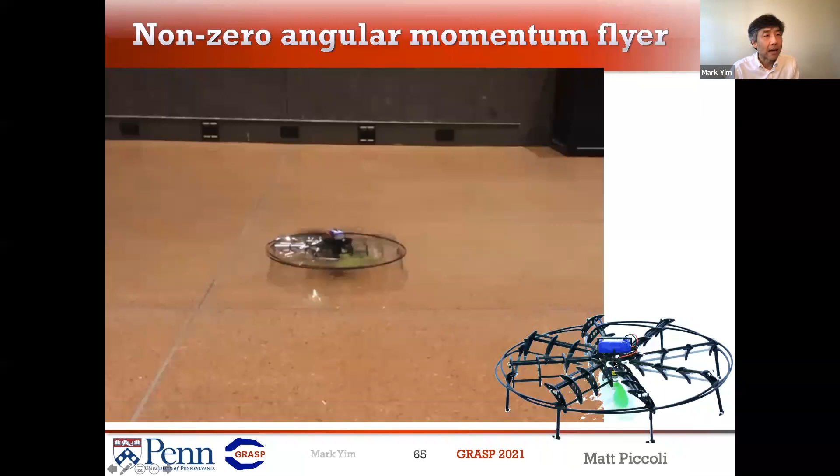So why does that happen? It's essentially because of differential lift, which I don't have time to go into. But basically, there's another thing that causes things to work more passively. If you make a vehicle that's flat, and make sure that the lifting components have the most mass, then it will be passively stable. So you can get rid of the IMU and make a passively stable mechanism.

So we realized you can do that. If you take a motor and two propellers and put them together, you can make this. It's a super simple robot. It's just a motor and two propellers, but they have to be made in a way that it's passively stable, so you don't have to have all this extra mechanism to make it fly correctly.

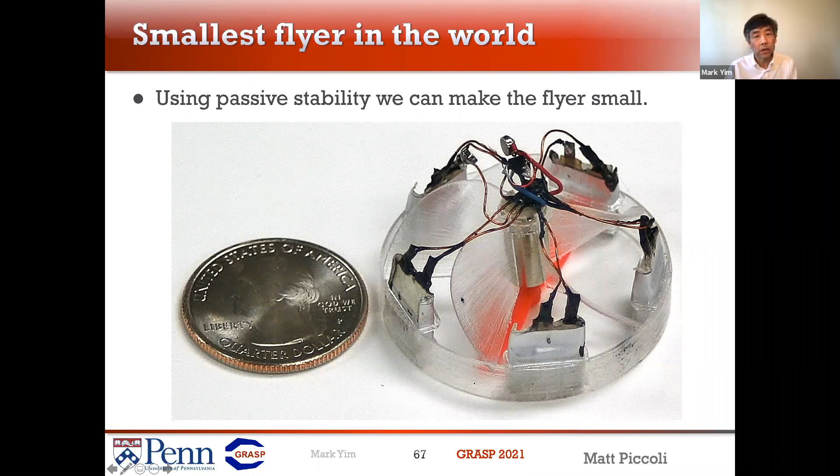So this gray part that has the batteries on the outside has the most mass and has lifting surfaces, so it ends up being passively stable, and it's in the Guinness Book of World Records for being the smallest flying vehicle. Mike Rubenstein and I later got a DARPA contract to see if we can make it even smaller. We ended up making one that's smaller than 2 centimeters. We do have the smallest vehicle world record. More recently, this is actually, I think, from a couple days ago.

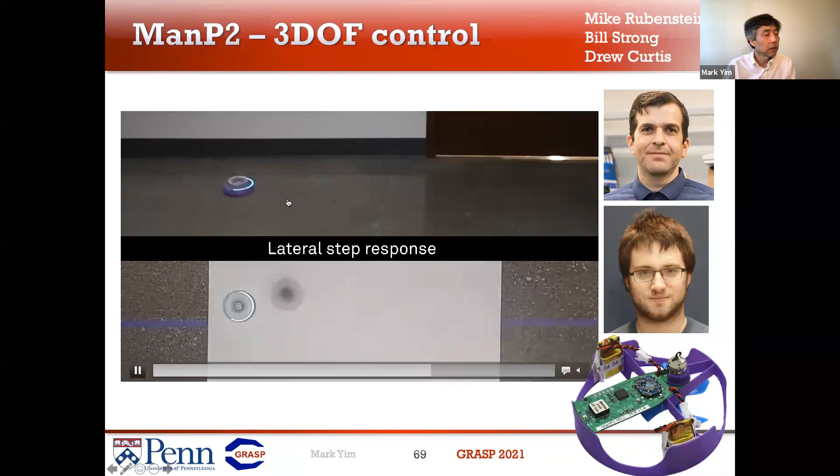Mike and Bill Strong and Drew Curtis have also made this vehicle be controllable. So building on what we did with Piccolissimo, a key to this is that the motor, and the spinning axis of the propeller, needs to be offset from the center of mass. If it's offset, then you can do control, 3 degrees of freedom. You can do a step response or follow a path or do whatever you want.

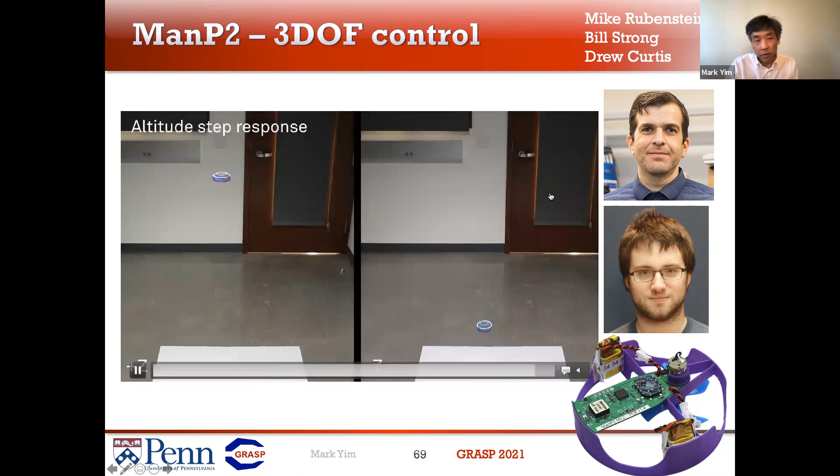These guys did some fantastic work in actually getting this to work really well. So by having it offset, you can kind of pulse the motor at the right time, and that will get it to change its attitude. Another kind of funny thing about this is that all of the complexity of the system is in the frame, where we also incorporated the blades. There's just a motor and another prop, and that's it.

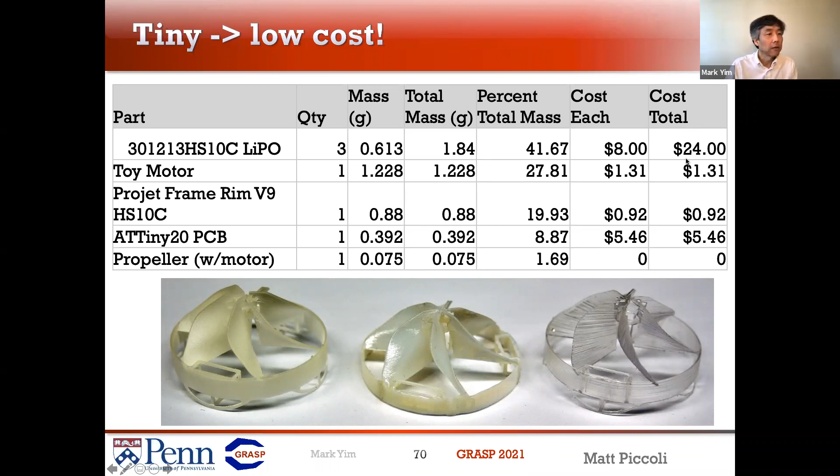Because all the complexity is here and we 3D print, the cost for complexity in 3D printing is free. It doesn't matter how complex it is. The cost of 3D printing is just the total mass. And because we're trying to minimize the mass because we're making a flyer, it's really cheap in terms of structure. The most expensive part of this is the batteries, and I don't think we can do anything about that.

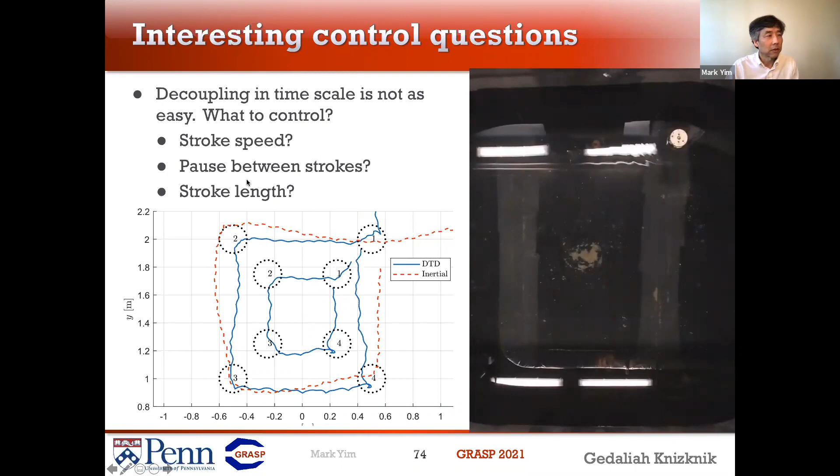Okay, the last thing we have is the boat, which is again another one-motor boat. There are some interesting problems with having a boat with one motor, and that comes into the time scale. With a flyer, the time scale is very fast relative to the time scales of what you want to control. Here, we've got this thing that's pulsing, doing a stroke at a time, and the time scales are close. So there are some issues in how you control it. I've got a couple papers on that, in case you're interested, I can show you them later.

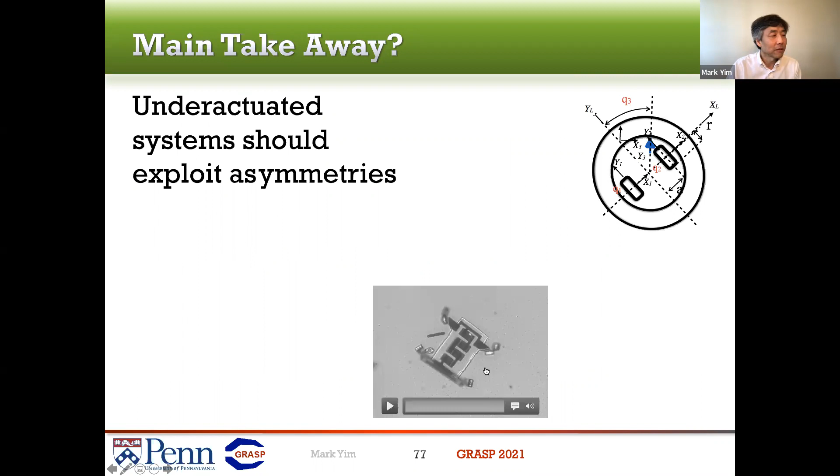All right, the last main takeaway. This is one thing that I just came up with. I just started thinking about this last night, and I was thinking, I've got this thing where things are symmetric, and that's bad. In this particular case, symmetry is bad. And then I was looking at this guy, where it's moving, and this is tiny, and it's moving in Stokes flow, and the legs only just move back and forth. Normally, that would mean it would go back and forth and not make any forward progress. There's something asymmetric here in the physics that we're trying to understand to make it actually move forward.

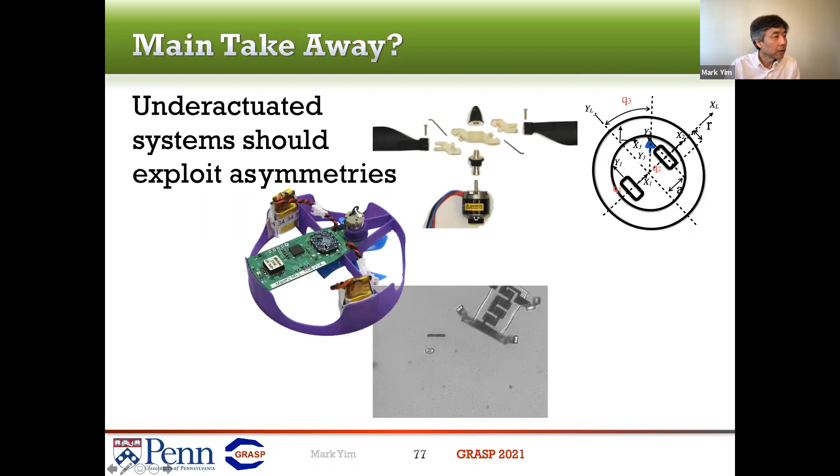This guy, the axes are not symmetric. They're now leaning over. This thing works because it's not symmetric. The center of rotation is off from the center of mass. This guy has flippers that are not symmetric. They're slightly leaning forward. That's why it works. Even this thing, the manipulation, the center of mass is not in the middle as we lift it up. It works because it's offset. Basically, I was thinking, wow, the main takeaway is symmetry is bad. Which then I was thinking, no, that can't be right.

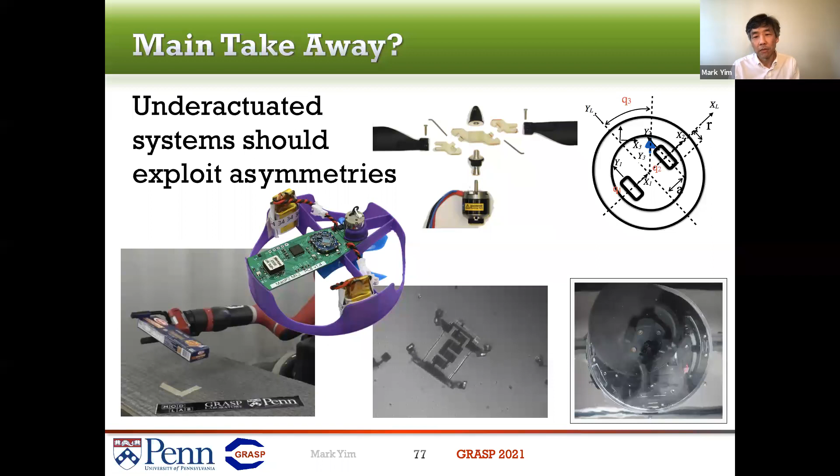You have things in nature that are beautiful because they're symmetric. It's not exactly that symmetry is bad, but when there's an asymmetry, that's what we need to exploit for under-actuated systems in order to get things to work, and maybe that's a key thing. Anyway, so that's the last slide.